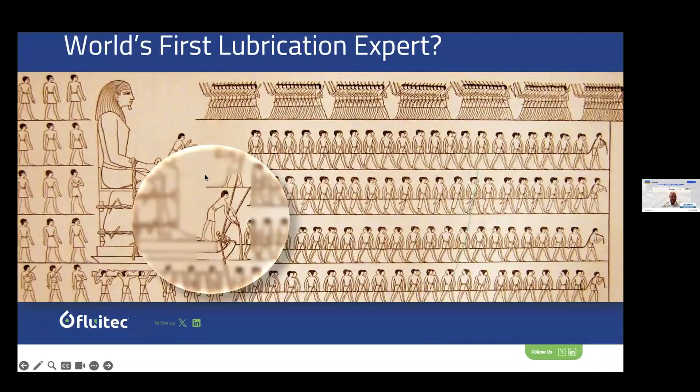So he might be the world's very first lubrication expert. But when we move forward to more recent times, there has been a lot of reporting from industry specialists and reporting agencies that there is a lot of money to be made in the industry by improving efficiency of lubrication. And they called it here, they started to call it in 1966 its own science, tribology, the science of tribology, which means the science of surfaces in relative motion to each other, and also including lubrication, friction, and wear. That is what tribology stands for. So this term was coined in 1966, and this is what we still use today.

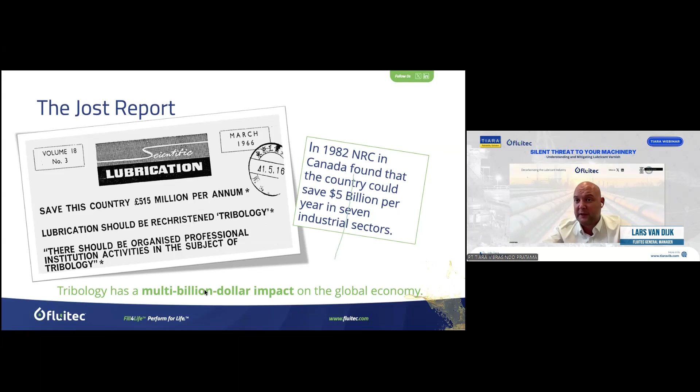In 1982, for example, a research in Canada found that there could be 5 billion saved across 7 industrial sectors if people would pay more attention to lubrication. So this science of lubrication has a multi-billion-dollar impact on the global economy and has a lot of potential to save money for the end users. And today we will dive into a little bit of how.

So how can this lubrication thing, this tribology, actually save you some money? Well, first of all, it can help you to prevent catastrophic failures. Now, what I'm showing you now is an extreme case, of course, where we have a coal-fired power plant in South Africa. Due to improper lubrication, the valves stuck and the system was able to run away.

The overspeed trip assembly was not functioning anymore. And this led to a runaway turbine, which then eventually exploded. So you can see here the bullet holes, so to speak, the shrapnel going through the roof, and here the parts that were flying around.

The company officially said this was just a routine test and they were planning to destroy it, but that was not true. The employees of this company were unhappy, and they leaked to the press what really happened.

They went behind the backs of their boss and said no, that's not true. This was a failure due to improper attention to the lubrication.

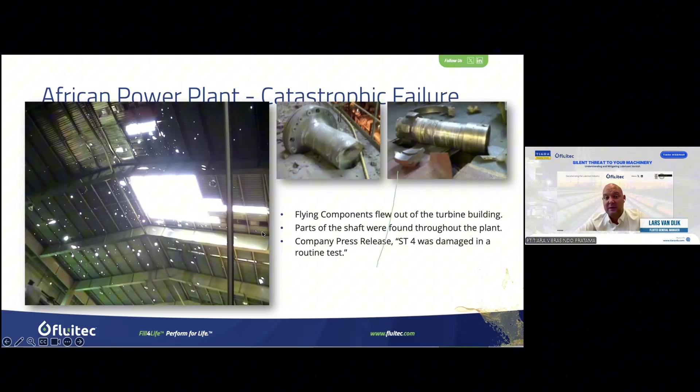Of course, this is an extreme example, but also in smaller turbines. This is in a university campus in the US that had their own power generation. You can see that they were doing a very old-fashioned kind of lubrication monitoring.

They were only looking at viscosity and acid number, which is a very traditional, very old way of monitoring turbine oil. But it doesn't cover everything, and it cannot allow you to be predictive.

So what happened, suddenly there was an issue that went undetected. There was a leak, coolant was mixing with the turbine oil, which led to high oxidation and increased acid number, which suddenly increased the viscosity of the oil. That led to an immediate failure of this turbine.

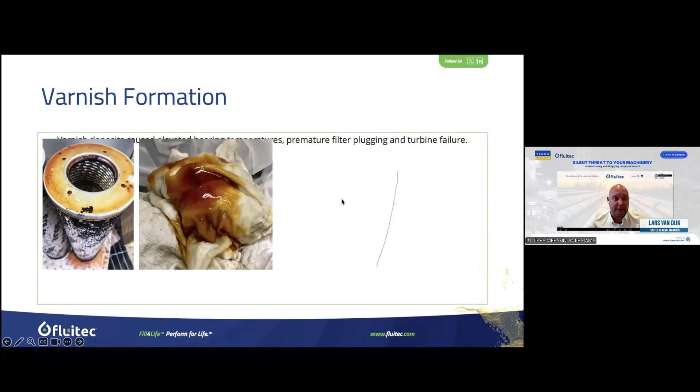You can see in the filter examination that there was clearly a lot of stuff in there that should not be there, and the filters were completely plugged. When we analyzed this, we could clearly see that this was oxidized oil as a result of a coolant leak.

But by then, it was too late to save the turbine. Of course, the damage was done. And this company is now one of the best customers of FLUITEC because they never want this to happen again.

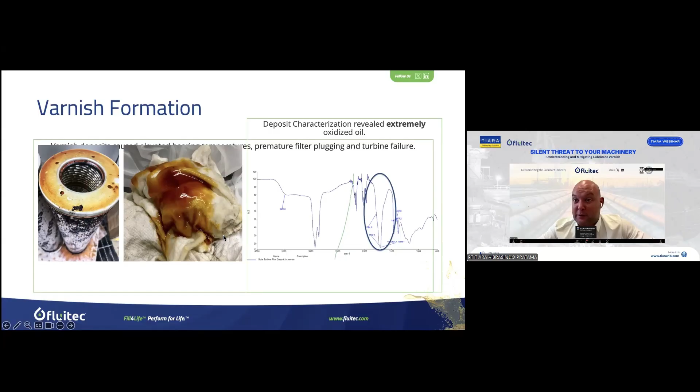So another way of looking at this is when we look at the environmental aspect. When we consider lubricants as a bad industry for the environment, that's logical, right? It's a brown industry. It takes a lot of energy and a lot of pollution to produce lubricants.

But when we look at the scale of lubricant production versus the energy that gets lost in friction, you can see that the energy lost in friction is many, many times more than what it actually costs to produce lubricants.

So even if we reduced the friction by a few percent, we could save so much energy. That means if you're a power plant, or even anything that uses a lot of moving parts, by reducing friction, you reduce your energy expense enormously.

Now, of course, we live in a world today where energy prices are going up and up, so this becomes even more impactful. By increasing the efficiency of your lubrication, you reduce friction, you increase your efficiency, and you reduce your energy spending.

Good for the environment and good for your bottom line. So you save money while you're also helping to save the environment.

So let's look a little bit deeper into rotary equipment, turbines and compressors. Later we'll talk a little about hydraulics. I'll go over this fairly quickly because people who operate this will be very well aware.

But just to give you an overview, these are the typical types of rotary equipment with varnish issues, such as gas turbines, generators, self-synchronizing shifters, steam turbines, auxiliary systems like oil tanks and pumps, and gearboxes.

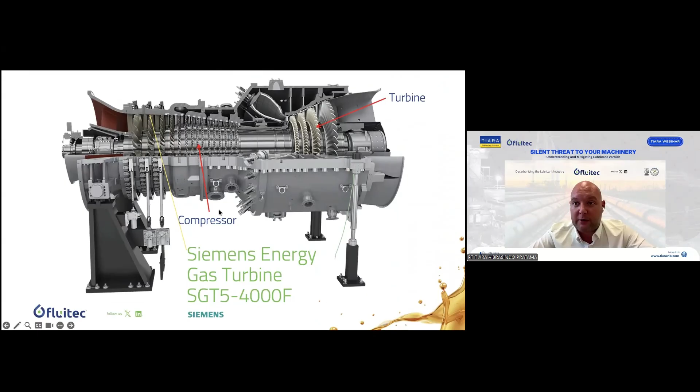Just to give you an idea, this is a Siemens Energy gas turbine 4000F, the SGT5-4000F, which is a very commonly used product here in power gen. We are treating one of these in Singapore, huge turbines, 40,000 liters of oil, so big systems.

The critical areas would be in the bearings and in the inlet guide vanes, because they are operated by valves. And if these valves start sticking because of improper lubrication, then we can run into issues.

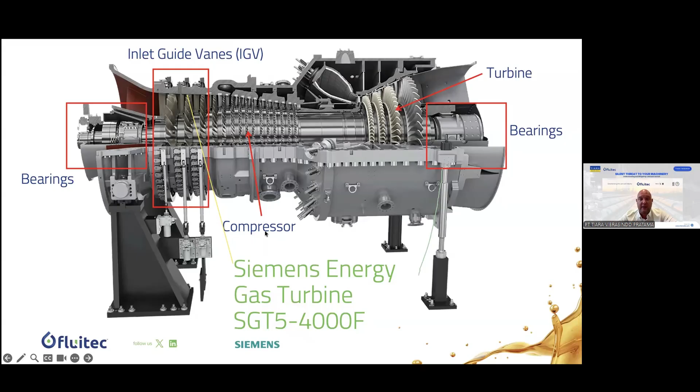This is an example of a steam turbine, in this case a nuclear steam turbine, a huge unit, this one an SST 9000. You have a high pressure turbine and low pressure turbines.

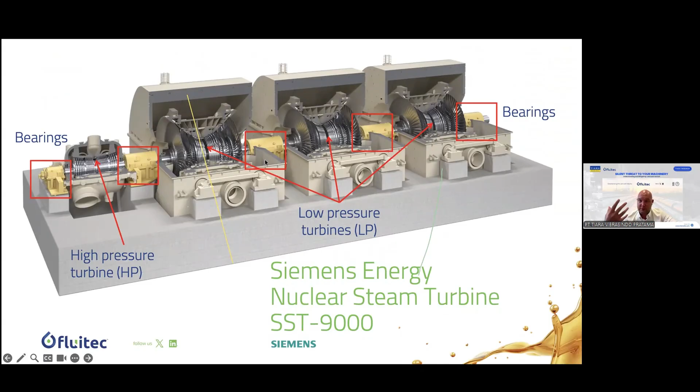Critical areas where a lot of oil runs through are the bearing systems as well. They can have varnish, which increases their temperature and leads to a lot of issues.

Let's look at a typical PowerGen oil module. This is a big engineering part of the turbine, because sometimes you think an oil tank is just a tank, but actually it comes with a lot of complicated systems and redundancy. For example, you have two full capacity AC lube oil pumps.

And for when there is a failure in power, a direct current emergency oil pump. Two full capacity redundant oil filters, two full capacity, fully redundant oil coolers.

So when one fails, there's full redundancy. This shows you how much emphasis the OEMs put on proper lubrication and on the oil system.

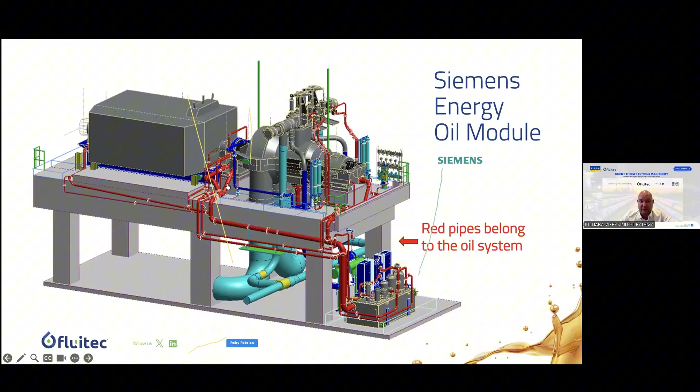You can also see this from this diagram here. The red pipes in this system indicate everything that's part of the oil system. It's a huge engineering item, with a lot of areas where the oil has to flow through and can encounter stressors and other things that could impact its performance. It's an enormous engineering part of power gen turbines, for example.

Now let's look a little bit at how these oils can degrade and what the problem of varnish can be in these systems.

I don't know if you guys can see this yellow line appearing on my screen, but okay, I'll try to work around it.

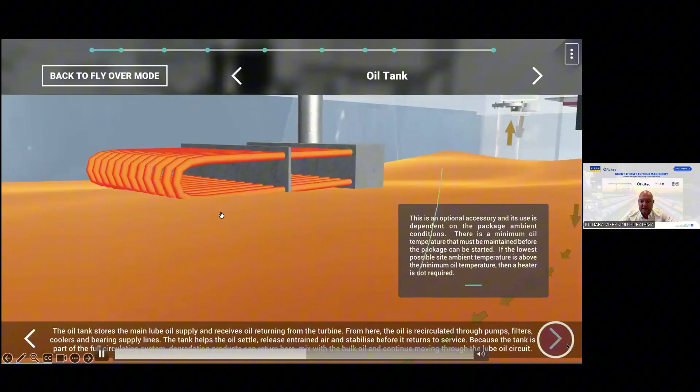So this is an animation where you can see the turbine gets opened up, and we can see a little bit about how the oil system works. This is a typical power gen gas turbine package, and this is the oil tank that in this case has a submerged heater, which is not always the case in turbines. But when there is an oil wetted heater system, this can of course be impacted by varnish. Sometimes the oil needs to be heated before starting the turbine, which can be a reason to have this kind of system in place.

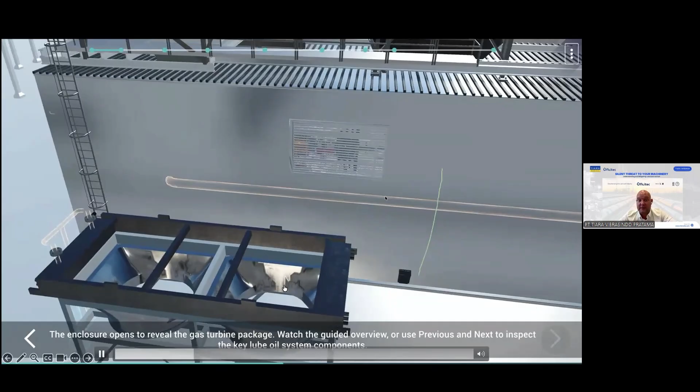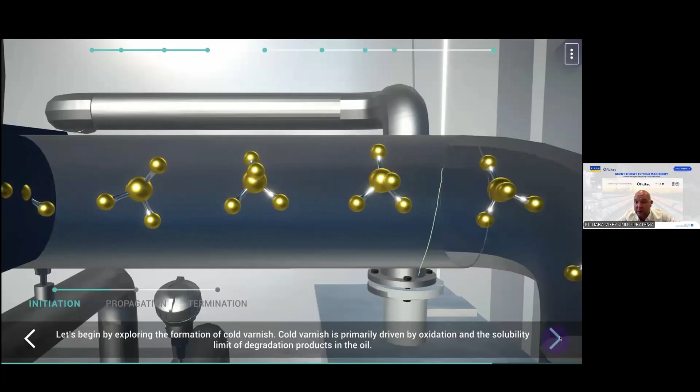Now we can look at exploring how varnish originates. You can see here these are depictions of hydrocarbon molecules, so oil molecules flowing into the turbine system, nicely clean. But let's look at what is happening to this molecule when it flows through the system.

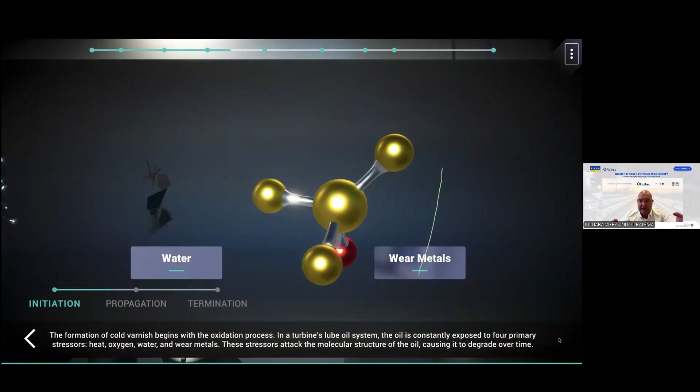Now it is starting to be interacted with, or affected by stressors. Those can be heat, oxygen, things like water, also wear metals in your system, all impacting this oil molecule. You can see that it's suffering, it's starting to degrade, it loses a little bit of its composure, and it might even become a charged particle. So that is the initiation.

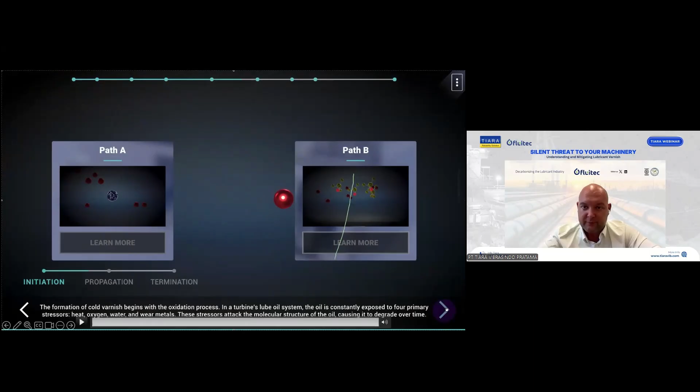What happens then? It produces something called a free radical, a molecule that is very reactive and doesn't have a purpose. Now we have this free radical, and there are two things that can happen to it. Let's see what can happen.

The first option, path A, is that we have an antioxidant in the system. The crystal ball here is the antioxidant, and it starts to neutralize these free radicals, because that is what an antioxidant is supposed to do. It's going to protect the oil from these free radicals. But the more it does that, the more it reduces in power. So the more free radicals you have, the more antioxidants will be consumed, and your antioxidant level will get lower and lower.

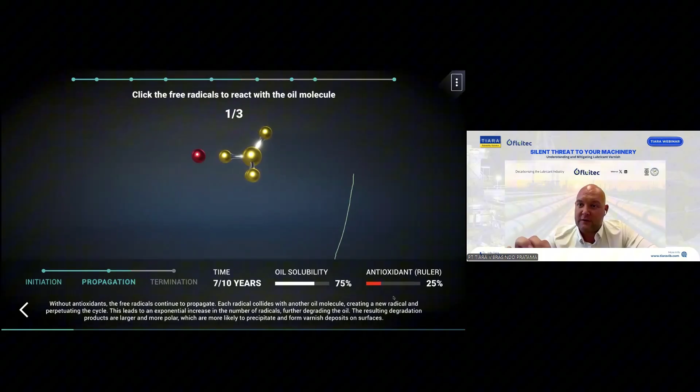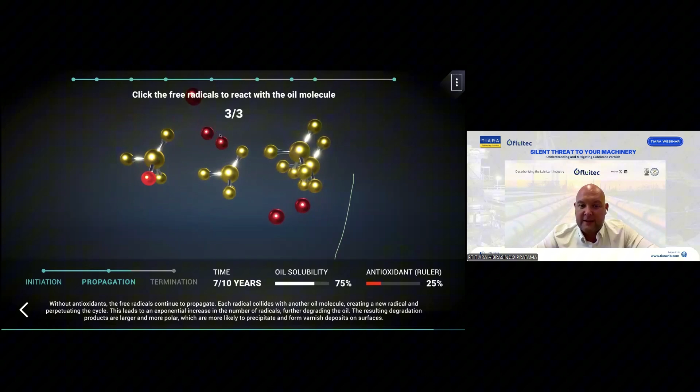So then when you do not have any more antioxidants, you start to propagate the free radical. That means these molecules being attacked by free radicals are no longer protected by antioxidants, so these free radicals can reproduce and attack other molecules. That is how we really start to degrade the oil. We call it propagation because this problem gets bigger and bigger, and your oil will start to degrade from this point onwards. So it's very important to keep a good eye on the additive level, primarily the antioxidants in your oil.

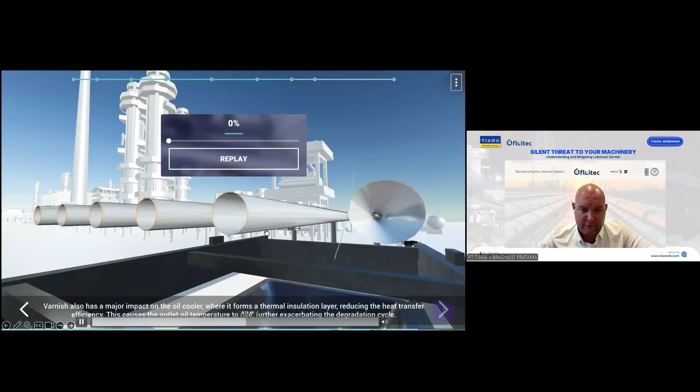So let's see here what happens when we have varnish in the system. For example, you can see this in oil coolers or heat transfer systems—you can visually see varnish occurring in your oil system after this has happened. But also in hot areas of the turbine, that is what we call hot varnish, where the oil film is operating under high pressure and high load, and the actual oil film is very, very thin.

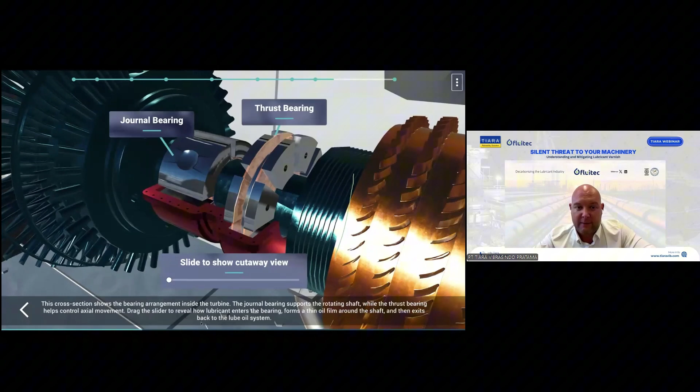That is where we have what we call shear stress on the oil. This happens in, for example, journal bearings or thrust bearings, which you can see depicted here. There's only a very thin layer of oil, even if you have 40,000 liters of oil in your system. Right in this bearing, the oil layer is very thin and exposed to a lot of heat and stress. So when you have varnish in your system and it goes into the bearing or thrust bearing, it will create localized hotspots and deposits.

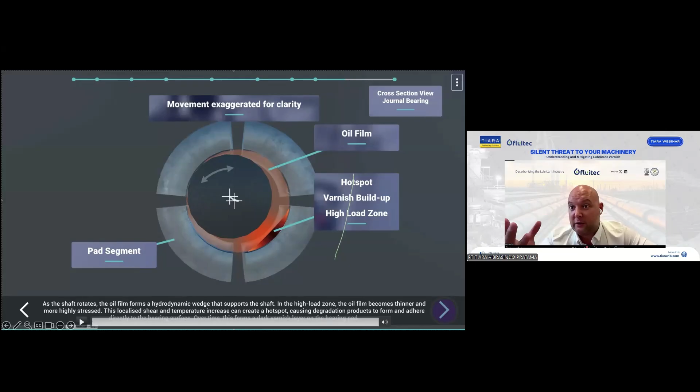There could also be a hotspot in the oil film itself, in the bearing, that is increasing the varnish buildup locally. That's what we call shear stress deposit, which you'll hear more about later. So there you have a hotspot and a buildup of varnish in this bearing—that's the picture I showed at the start of the presentation, a perfect example of what's happening here. The hotspot leads to localized varnish buildup in the high load zone, causing deposits, otherwise known in the industry as hot varnish.

We figured out that in the oil film, the hotspot can go above 200 degrees C in the oil layer, and that can really degrade the additives of the oil. This has been supported by research with OEMs, which we can share with you in the future.

Let's see what happens to the bearing once this varnish occurs. The bearing is lubricated by an oil wedge—I know the positioning of the shaft isn't entirely accurate here, I apologize, we need to update these animations, but for now it works to explain this. Here you see the varnish building up, which increases your temperature. The temperature will go up, but then the varnish will suddenly be wiped off. We're depicting that wipe-off event here—let me play it again.

What's very telling when you have varnish in your bearing is this symptom: you need to pay attention, because when you have these temperature fluctuations in bearings, that likely means you have deposit or varnish in your bearing. You can measure that not only by oil analysis but by looking at the temperature. Look at how it fluctuates—it goes up, then suddenly down. We call that a sawtooth pattern. When you encounter this in your bearings, it is most likely due to varnish and deposits.

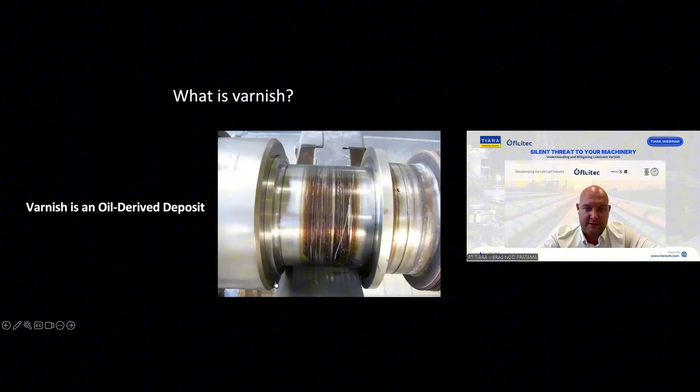Varnish is an oil-derived deposit, so it's not an external contaminant. It's coming from inside your oil, from oil degradation, and it's very difficult to wipe varnish.

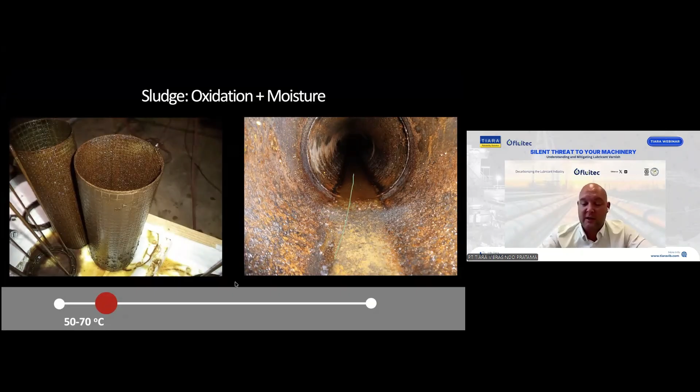Let's look at the different kinds of varnish we encounter. Sludge, for example, is usually oxidation plus moisture—very sticky, sludgy. That's why it's called sludge, material that is easy to wipe or manipulate. It gets clogged into your filters or piping system, as you can see here.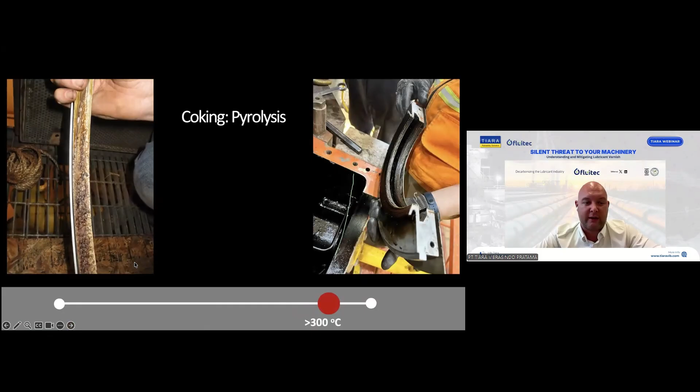At much higher temperatures, you can get coking or pyrolysis, but this is really rare to see—just for completion, we included it. Varnish can have a lot of different appearances, not just one brownish substance. Sometimes we encounter jelly or coking in the filter, which are actually also forms of varnish. It can come in many different colors too—it's not just one type of degradation. There are many complicated origins that can cause varnish in your system.

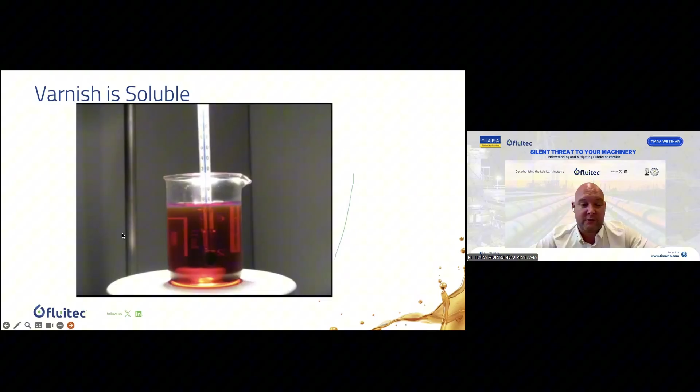What's also important is that varnish is soluble. At room temperature, you can clearly see something is wrong with this oil, but when I increase the temperature to about 50 degrees C, the normal operating temperature, the varnish suddenly dissolves, and with some turbulence it dissolves even quicker. These are the exact operating conditions in your equipment. This is why you cannot filter out varnish—once in operating conditions, it passes through your filter membranes and is almost impossible to remove unless you use specialized solutions, which we'll talk about later.

So let's look at why this is such a big issue today.

What is the origin of that? That is actually a multifactorial thing, because it has something to do with the application side. The OEM is always pushed to design higher efficient turbines, higher thermal loads, higher power outputs, and so on, which finds its way into the design of the oil system, the design of the bearings, the valves, and all of that. Everything is always designed to be more efficient. The oil volume tends to become smaller because they want to use less oil for a varied amount of reasons.

On the other side, it has something to do with the oil. The formulation of the oil, the actual chemistry that goes into the oil, has changed. There's different kinds of base stocks, different kinds of additive chemistry that is combined with the operating conditions that the OEM has now designed. That is basically creating a lot of varnish at the moment. So it's a huge issue.

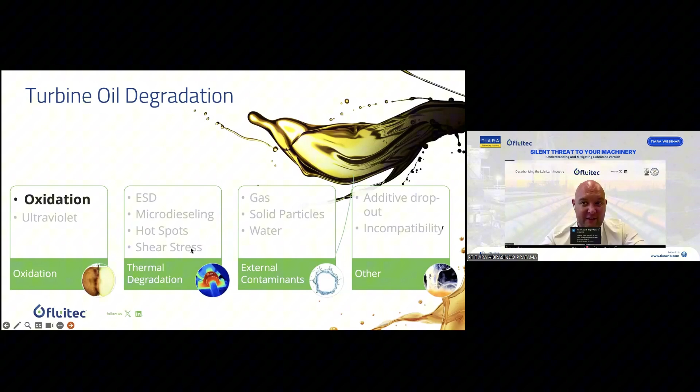Let's summarize a little bit about the two main failure modes that we have distinguished so far in turbine oil, so rotary equipment, for example, but this also applies to hydraulics. It's the same method of degradation that we see in hydraulics that we can also treat with our products. For example, the main thing is oxidation. Everything oxidizes when you increase temperature. It doubles in oxidation. By 10 degrees temperature, the rate of oxidation doubles.

Another thing that we've looked at already is shear stress. On the hot zones of your equipment, shearing stress can increase the temperature of the oil film, which then leads to deposits and varnish. Or the varnish that is already in your system tends to settle out in the hot zones of your equipment, which are also the most critical zones. So this is a huge issue.

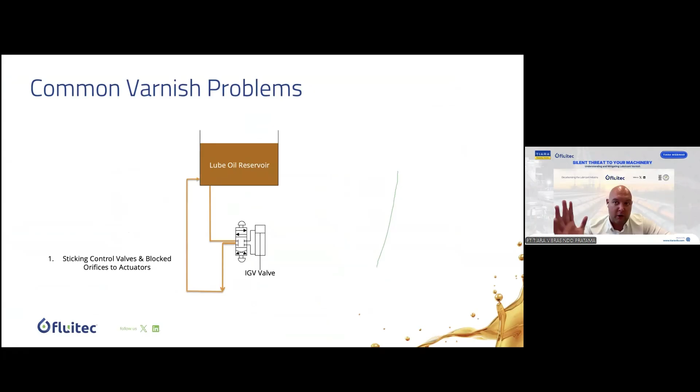So what kind of impacts will this have on your equipment and on your components? First of all, the lube oil reservoir, like we have just shown also in the picture, you can clearly see the bathtub ring, and it's not easy to wipe that. That can be the first indication of varnish in many cases. But the biggest issue that we see operationally are valve sticking or blocked orifices to the actuators, which reduce or even completely block the oil flow. That leads to massive issues.

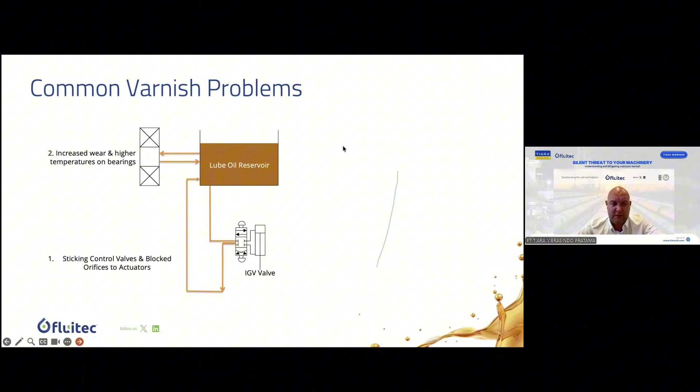That is also the case that we saw with the exploding turbine in the beginning. That is a perfect case of valve sticking. The second most common problem with varnish is bearing instability. Remember the temperature graph that I showed you, the sawtooth temperatures? That is bearing instability. It will also correlate with vibration. A huge issue at the moment for turbine users and rotary equipment.

Seals, when you have deposits in your oil, some oils are acting as a sealant, but also the degrading chemistry of the oil can impact the seal integrity. So you will get leakage of seals, for example, due to oil degradation. And what we have seen also in the animations earlier is cooler or heater efficiency. When they are coated with a layer of deposits, they become insulated and they reduce in efficiency.

So very often we visit plants that say, oh, my startup time increased a lot because my plant is old. And then we start to treat the varnish and remove it from the system. And suddenly the startup time reduces back to when the plant was new. And the operator thought this was not possible because they thought it was just wear and tear of the heater, but it was actually a varnish problem. So when we remove the varnish, the startup times reduce back to new.

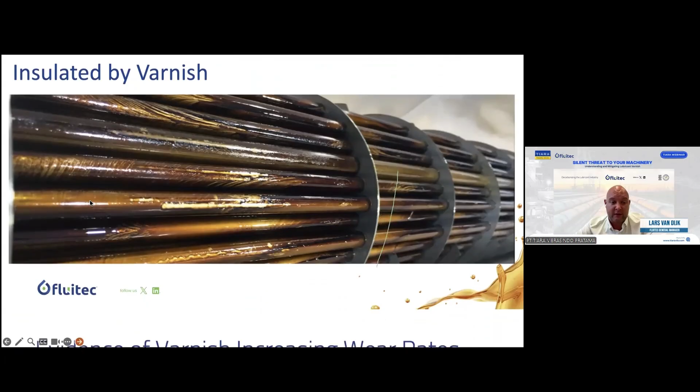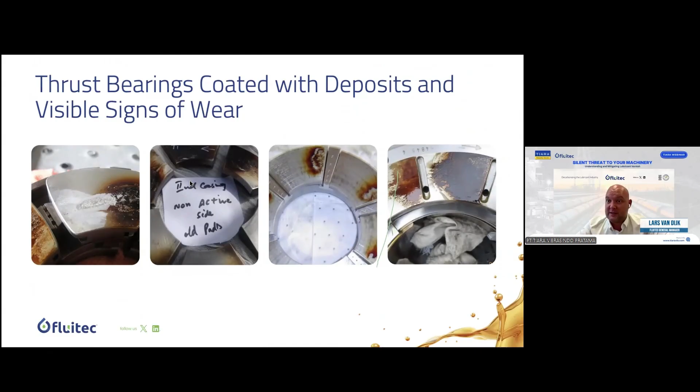Thrust bearings, the same thing. You can see here on the most left picture, you can see that there has been wear. So that means removal of metal. This is due to fatigue wear, due to constant metal-to-metal contact, slowly pitting out metal of the bearing, and this will increase the wear metals in your system and will eventually lead to a total bearing failure.

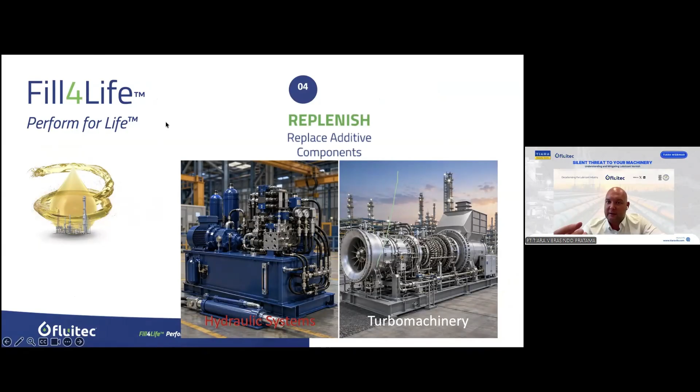Now let's look a little bit at rotary equipment, but what about hydraulic systems? And let's look also a little bit at the additive system of the oil, the chemistry of the oil, because there is such a thing that we call fill for life or perform for life, which are linked to each other. That means that we can replenish or replace the additives in your oil to prevent oxidation.

So modern hydraulic systems, for example, they fail mainly two ways at once. One is generation of deposits, so oxidation related. The other one is because the additives are depleting. That means that, for example, in hydraulic you have sometimes zinc or complex antioxidants, which then reduce the anti-wear capacity of the hydraulic. That leads to high wear and tear of the equipment. So it's deposits and oxidation and additive depletion.

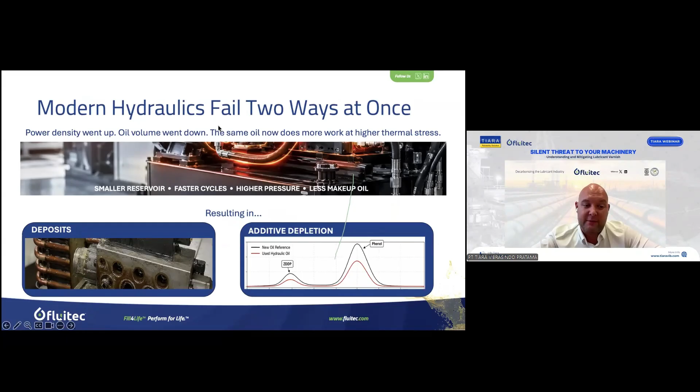And in hydraulic, we also have the same problem that we see in turbines. The power density went up. That means the equipment needs to be more efficient, whilst the oil volume is going down. So that means more stress on the oil, which leads to bigger problems with oil systems.

So when varnish shows up in hydraulics, you can get things like valve stiction, loss of heat transfer of the oil, and wear and internal degradation of your system, of your equipment, because the additive system is no longer able to protect. So for example, in injection molding, you can get shot-to-shot variation, which means that maybe you have to scrap a whole batch of material because the production was not accurate enough. That can be due to valve stiction, for example. Of course, higher scrap leads to lower yield and more frequent, longer taking mold changes.

Presses and stamping, you could get a line-wide downtime just from one little valve stiction, and we see this a lot. So this is a big issue, and it's so easy to solve because it's just due to a little bit of varnish in the system. But it happens - the whole line will be shut down because of a minor deposit issue.

In steel, you can have a quality downgrade and breakout risk because of the degradation of the gauge control. Mold oscillation and instability can happen as well, for example. And in pulp and paper, you can get off-spec reel and hours per break, for example. So pulp and paper is an area where you see huge oil volumes and a lot of emphasis on heat transfer as well, and that can be highly impacted by varnish.

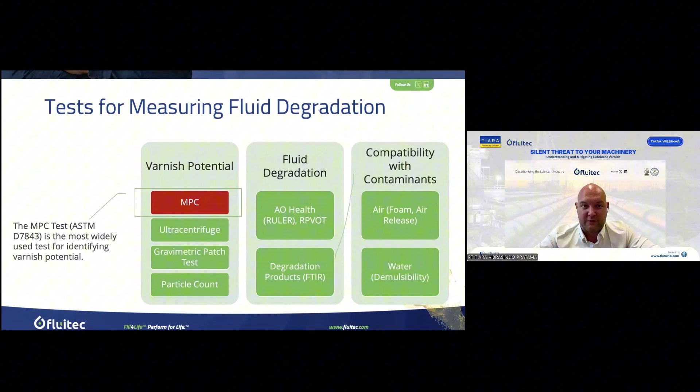Now, when we talk about solutions, we first need to talk a little bit about testing, because we need to perform the right tests on the oil, especially in rotary equipment. In hydraulics, this is maybe less common, and you can look at operating conditions such as clamping speed, accuracy of your injection mold, valve sticking, and so on. That's for hydraulics, the main mode of looking at it. But when you have big oil sums, a huge power gen turbine, usually you will have some form of oil analysis program, and you will test your oil hopefully regularly.

So the tests that we would recommend to prevent varnish are actually two main tests. The most obvious and easiest one to do is the MPC test. Our partner PT Tiara can help you with setting this up. The MPC test under ASTM D7843 is now the most used test to look at the varnish potential of the oil, and I'll show you how it works.

Another test that's very important is to look at the additives of your oil. You can do that by doing a destructive test on the oil, which is the RPVOT, that oxidizes the oil to failure.

But that's a pretty difficult test to do, and it takes a long time, and you need to have a lab that is able to do it. It's usually quite expensive. So we have developed another test, called the RULER test, which looks at the amount of additives in your oil. Combine this with the other tests you see on the screen, and now you have a full oil analysis program that allows you to be more preventive instead of reactive with your oil.

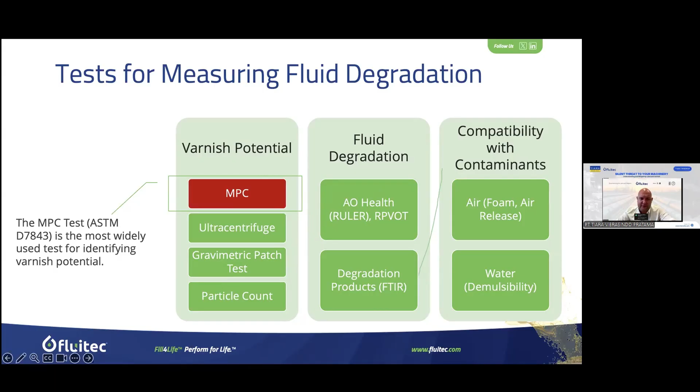So a little bit of an example about the MPC, how it works. It stands for membrane patch colorimetry. It's a very quick, cost-effective way of assessing the oil's varnish potential.

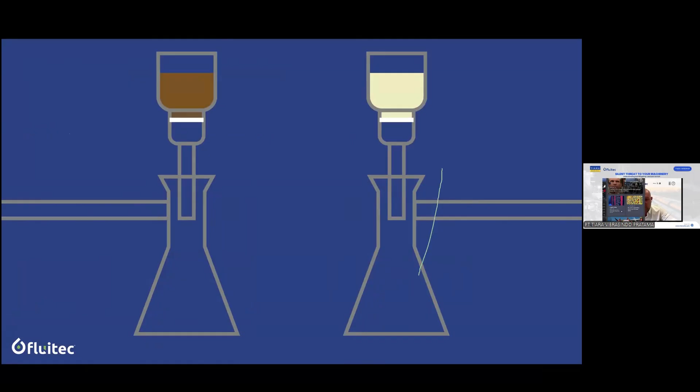Because when we run the MPC on the lighter colored oil - this is an example of the MPC test - it gets pumped through the patch, which is here in the white area, and then we measure. And as you can see, surprise, the light-colored oil has a higher varnish potential than the dark-colored oil. So the MPC test is perfect for determining how much varnish is left on the patch. We rinse the patch with a non-polar solvent, which attaches the varnish to the patch, and then we can measure how much varnish potential is in the oil.

So we do that via delta E. And the oil color is not related to the amount of varnish that is in the oil. I think that's always very important for us to highlight, because so many people in the market still look at oil color as a very important way of determining oil health. But we have seen beautiful light brown, golden colored oils that give you very high varnish potential. So please don't look at oil color as a reliable method.

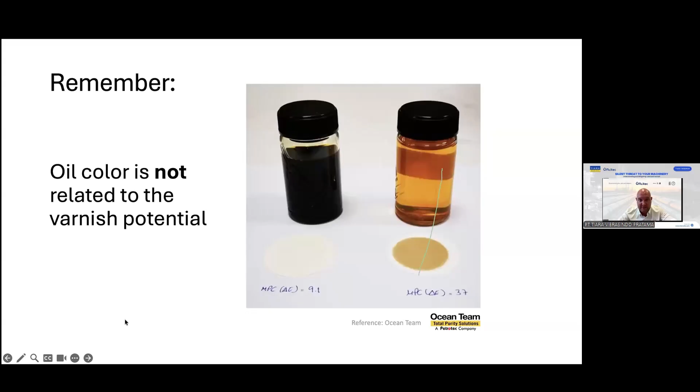As you can see here, on the left side, we have almost black oil that has an MPC of 9.1, which is very good. On the right side, a beautiful colored brown, goldish colored oil, and surprise, an MPC of 37, which is critical. So the right oil needs to be changed. The left oil is actually perfectly good to go, judging by MPC. So please look at MPC and not just oil color to determine the varnish potential of the oil.

With the MPC test, we can look at the color spectrum for degradation products related to soot, which would mean a temperature issue, EP additives that might have come out of solution or been degraded, and sticky deposits generated as a result of oxidation. So it gives us a little bit of an indication of what the problem is in your turbine.

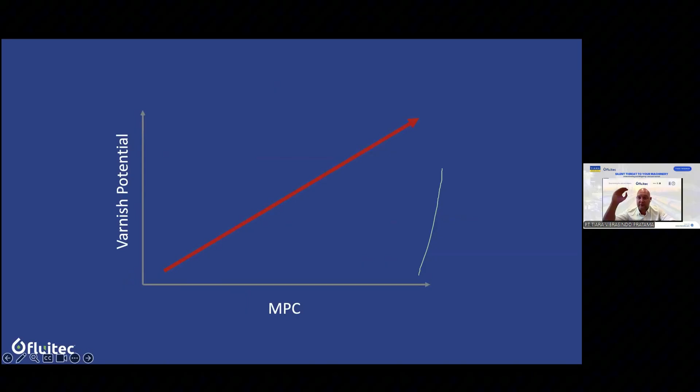If there's a lot of soot, a black patch, a high L level on the patch, we can look at thermal degradation, for example. If there's a lot of sticky oxidation-related deposits, we know we should probably look in the direction of oxidation. So the higher the MPC, the higher the varnish potential of your oil. The MPC is a very handy test to look at the health of your oil.

Now, when we combine this with RULER testing, that means we look at the antioxidants in your oil. We have two things that we look at: phenolic antioxidants and aminic antioxidants. Typically, turbine oils have these two antioxidants. In hydraulic oils, you would also have ZDDPs, for example.

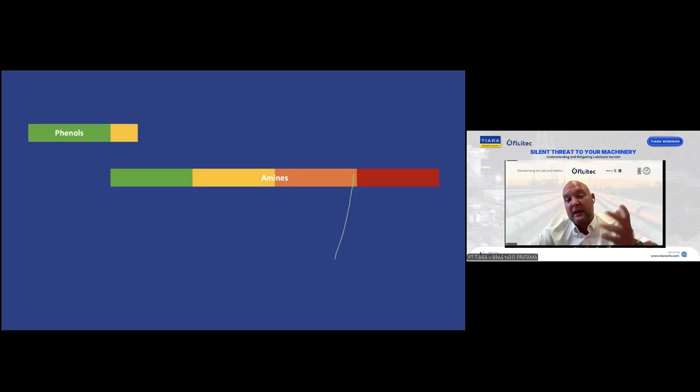If you have a zinc-free hydraulic, it would likely be aminics as well, or some phenols. But when you have a zinc-containing hydraulic, it's usually ZDDP as well. So we can measure that as well with the ruler. But this is for rotary equipment at the moment, what I'm showing you. So this would look at phenols and amines.

What we want to do with the ruler test is determine how much percentage of these additives are left. We want the oil to always be more to the left side - so more than 50% aminics left in the oil, or even more than 75%, is usually even better.

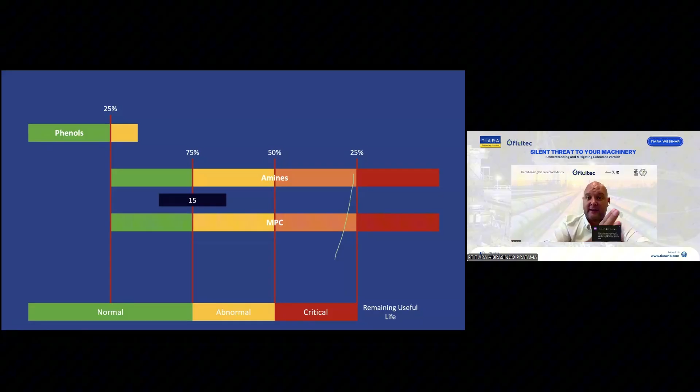The MPC test, we can put these two alongside. We want the MPC to be below 15. So if both of these are okay - meaning the ruler test is more than 75%, the MPC is below 15 - then we can say this oil is in good condition, and you are very unlikely to have varnish. In other words, you will have a good turbine oil life.

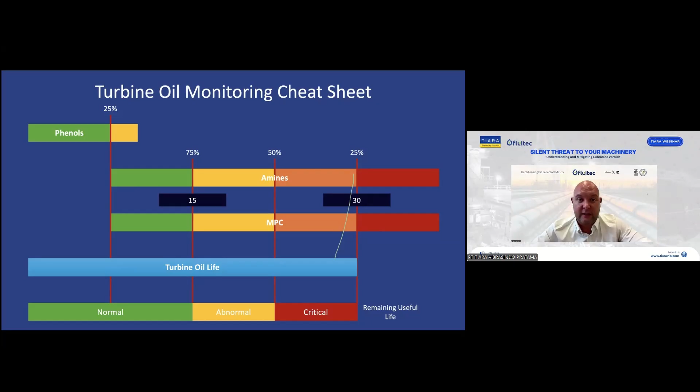The more it degrades, the less additives you have, the higher your MPC will be, the less life you will have in your turbine, and the more action you should take. We call this the turbine oil monitoring cheat sheet because it's a very easy way of doing some relatively simple tests. The RULER and MPC are not very complicated tests, and they give you a very easy, predictive way of looking at your turbine oil. Now, in field solutions, we can distinguish two main areas to deal with all these issues we've talked about today.

Firstly, we can look at filtration. We can do specialized filtration, which is based on electrophysical separation or ion exchange, which is a chemisorption process. It's like a chemical filtration process that's able to absorb the varnish from your oil that normally passes through your depth media. So it's a special filtration system, not a normal depth media filter, and it's tailored to removing varnish from your system.

Secondly, we can look at adding something to the oil, because the problem with varnish is solubility. It comes out of solution, but if we prevent that by adding a solubility enhancer to the oil, it never comes out of solution, so it doesn't become a problem.

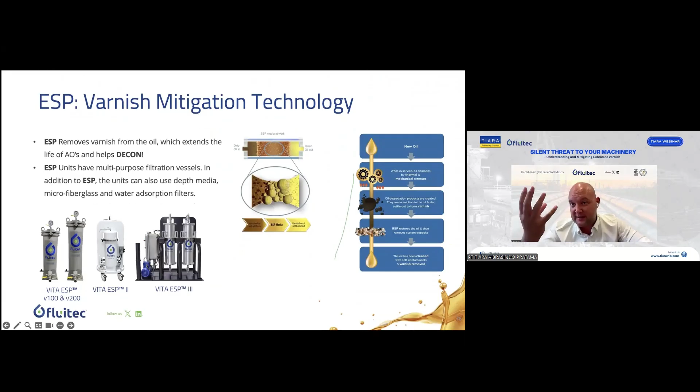First, let's look at the ESP system. The ESP is an ion exchange resin filter. There's resin inside the canister that's in a kidney loop system in your oil, and this interacts with the varnish, absorbing it into the resin media bead, cleaning up your oil. We use a specialized resin for varnish that we've researched for years, and it doesn't interact with your additive system or other oils, and it's very efficient at removing varnish.

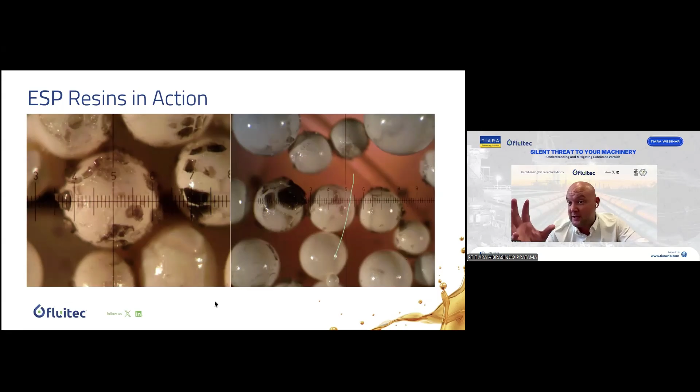So the oil passes through these resin media, and the resin media slowly absorbs the varnish. These do get saturated at some point, so we need to change them every 6 or 12 months, depending on how varnished your system is. It's a very efficient way of cleaning up your oil and physically removing the varnish, but it is a slow process and it costs some energy because you need to run a kidney loop in your system, and that requires a pump.

So we've designed another method, which is also very suitable for hydraulic oils because they tend to have smaller volumes, and a kidney loop filtration system isn't always practical on hydraulic oils or gearboxes. But this is also very suitable for turbine oils because it's a solubility enhancer. It's just one dosage into your oil that increases the solubility and prevents the varnish from forming in your system, and it will remove existing varnish as well.

So it stands for decontamination. When you already have a varnish problem in your system, like the bearing issues we talked about earlier, this is a very effective way of decontaminating and reabsorbing the varnish in your system. It works very quickly, with no negative impacts on the oil.

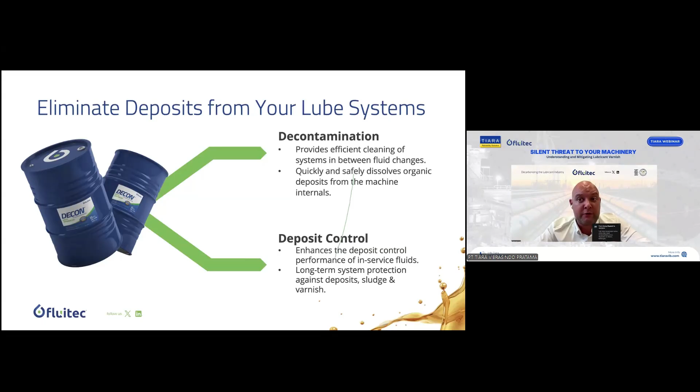We can also use it for deposit control, and that's really unique to this technology, because deposit control means preventive. So we can put it in your oil and let it run as long as your oil is alive. It has no negative impacts, and it will prevent varnish from building up. That's what we call deposit control. It's the only product that can be used both reactively and preventively in the world at this moment. These are approved by OEMs, so they are completely risk-free to use.

How does it work? It's a very simple interaction with the varnished areas of your oil. In this case, we have a degraded molecule, like we showed at the very beginning, that has been stressed and degraded and is producing free radicals. It will interact with the decon product and bond readily with oil degradation products, forming a new molecule which is no longer interactive. It does not produce any free radicals, so it's safe to be kept in the oil this way.

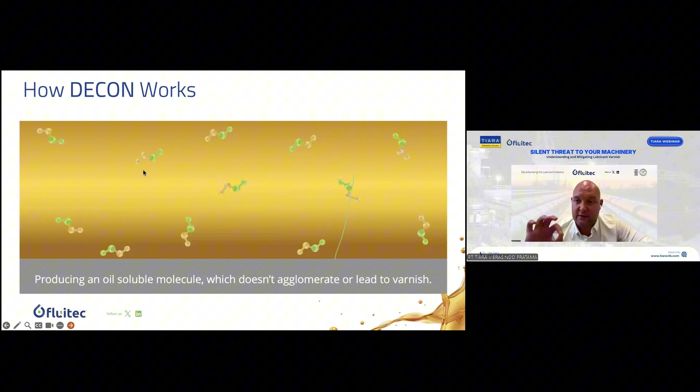Another way of saying it: it's producing an oil-soluble molecule. That means it's no longer interactive. It's no longer forming agglomerates, which means varnish and bigger molecules. It's no longer doing any of that, so it's perfectly safe to keep this molecule inside your oil.

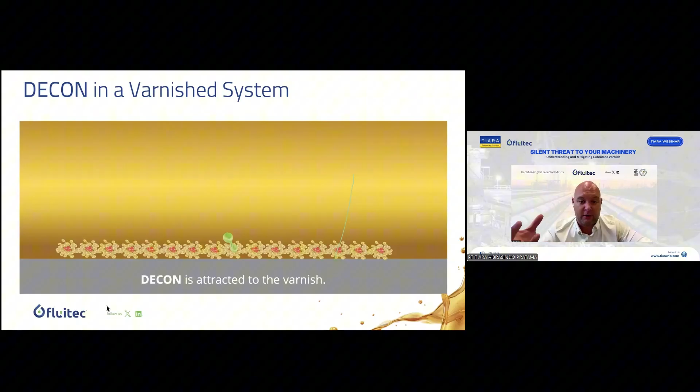Now, what happens if you already have a varnish layer on your bearing or valve or wherever it is in the system? As long as there is oil flowing over it and you have DECON in your system, DECON will be able to interact with the varnish that is already on the metal. It will be attracted to that varnish layer, bond with the core of the agglomerated varnish molecule, and start to generate dispersive forces by attacking that molecule. The molecule then disperses and gets reabsorbed back into the oil, allowing DECON to further interact with these molecules and form oil-soluble, harmless, inert degradation products. This is very safe to do until the varnish is completely gone.

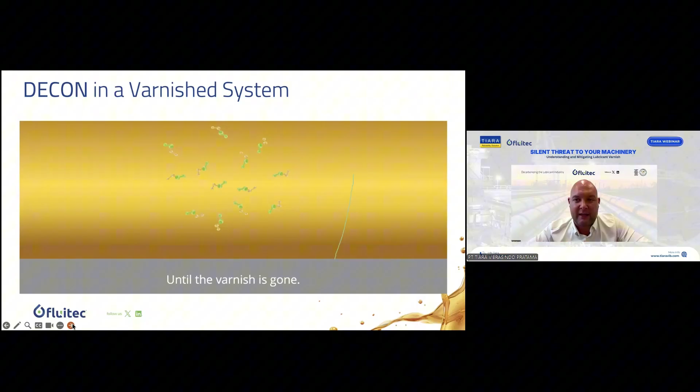Now, you have to think a little bit about the actual amount of material we're talking about, because sometimes people think, oh, this is scary, I'm redissolving it back into my system, that will lead to problems in the future. But the amount of material causing the varnish issues is actually very low. That's what makes it so tricky as well. It's causing a big issue, but typically when we redissolve that amount of varnish into the oil, it's not a problem at all. It can last for 10 years inside your turbine.

Also, with hydraulics, we can do something similar. We have the option of cleaning the hydraulic system with DECON. It cleans the whole system - the valves, the servo valves, anything that has accumulated varnish, the heaters, the coolers, the injection molds, you name it. We can clean that with DECON, and then we can, for example, change the oil to a new oil that will go into a clean system, which will last a lot longer.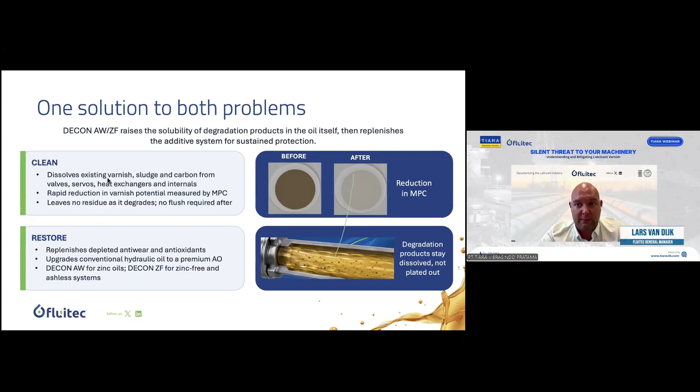But also, when the additives are consumed in hydraulics, we can add something called decon AW or ZF, where we add solubility enhancer plus additives to your system, which then replenishes the oil's ability to combat oxidation and completely restores the oil's ability to function. So that is extending the life of the oil. Otherwise, you would have to discard it. Now we can save your oil and prevent downtime on your system, and both your equipment and your oil will live longer because of this.

So we can solve the varnish issue in turbine oils and rotary equipment, but also in hydraulic systems. Hydraulics are practically everywhere - there are so many applications for hydraulics.

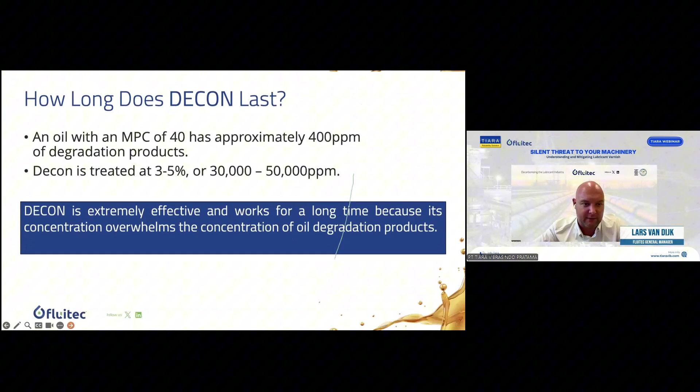So let me just see, because I can see that miraculously I have some time left. So I'm going to show you a little bit more. Let me see how much time I have. Okay, so...

When we have an oil that has a high MPC, the actual amount of varnish is typically no more than 400 ppm - this would be a critical MPC of 40. So when we put a solubility enhancer in, like 3 to 5%, that would be 30,000 to 50,000 ppm to dissolve only this 400 ppm of material. That is why this is such an effective method - it's a really unique way of redissolving the varnish in a safe and efficient way without any harm to your system.

And what makes this product so unique is that we have done a lot of research and we have patented this molecule to be suitable for use in oil.

So let's see - when we look at turbine oils, we also have the option of re-additizing. When the antioxidant levels of your turbine oil are getting low, there are 3 options you can pursue as an end user. You can look at bleed and feed, the very common practice - you discharge a little bit of oil, you put a little bit of new oil in, that keeps everything running nicely. But you are putting new oil into a contaminated or old system, or an old oil, I should say. Maybe your system is relatively new, but the oil is already a little bit degraded, and that new oil will degrade even faster when it interacts with the old oil.

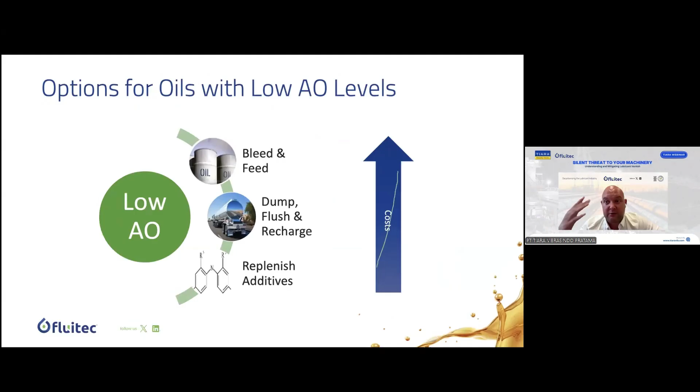So yes, it's an efficient way to prevent this shutdown, but over time, it's the most costly method you can use to replenish your additives, because a lot of bleed and feed is always needed to maintain similar oil health. And actually, you're doing an oil change. If you do 5 times 20% bleed and feed, it's an oil change. So if you do it every year, that means in 5 years' time you have changed your oil. But the oil is constantly in a semi-contaminated state. So the oil companies love this because there's a lot of volume in bleed and feed, but for you as an end user, it's not the ideal solution.

It's actually cheaper to do a full flush and oil change once every 5 years than do a yearly bleed and feed. But another option that we have is replenishing the antioxidants, replenishing the additives. This is a relatively new method, but we have proven this over the last 20 years, and it's a very efficient and cost-effective way that is now also approved by OEMs.

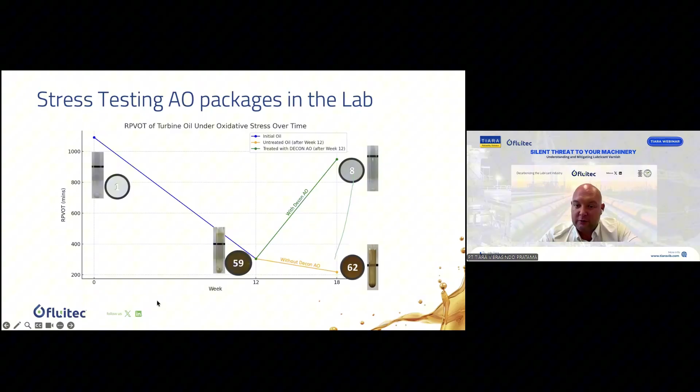If this oil has been in service and reached this point in 8 years, and you revitalize it, we can assume that it can last another 8 years. So instead of changing your oil every 8 years, now it becomes 16 years. If it's 4 years, maybe it becomes 8 years, right? So you can easily double the lifespan of your oil. If you don't do anything with the oil, the MPC will continue to go up, and it will run into a lot of issues, of course.

So let me just, sorry, I want to show another

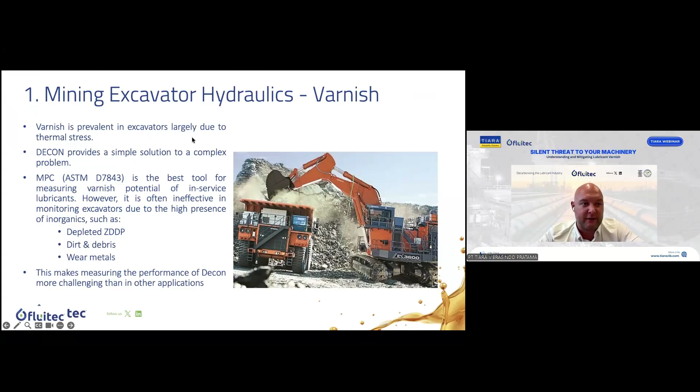Case study as well. In the world of hydraulics, we have also run a lot of case studies and tests. For example, here in excavators, they can fail due to thermal stress. And with Decon, we can provide a relatively simple solution to a complex issue. So we have seen that very common. You can see depleted ZDDP, dirt and debris in the system, wear metals in the system. So that makes it very susceptible to degradation.

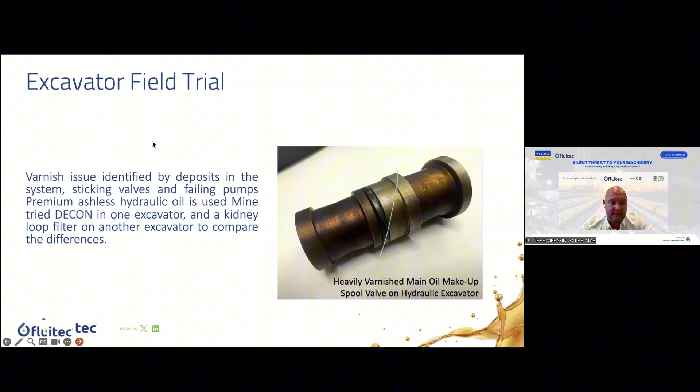And you can see here a heavily varnished actuator in an excavator system, and this led to a lot of issues within the system. So when we add solubility enhancer Decon into the system, this was verified by field trials. You can see that the oil was heavily varnished. And after treating it with Decon, it went back to below 25 MPC, or below 30. So from a highly critical oil, we went back to a non-critical and usable oil.

Over time, we could decrease this even further. And in a big excavator unit, this means that you can save a lot of oil. And also the system runs cleaner, at a lower temperature, more efficiently as well. So we think this is a great case study to see as well.

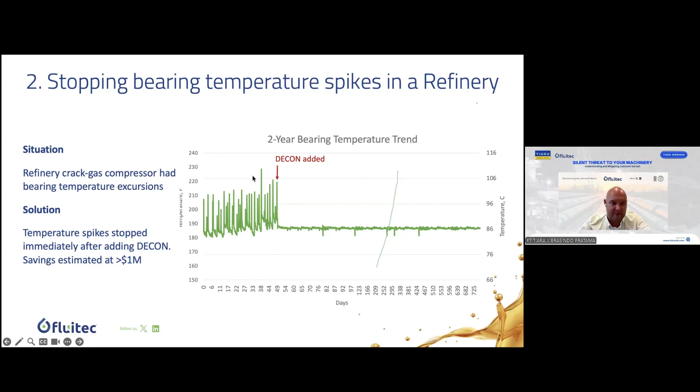So these are some of the main issues that we see with varnish and oil degradation, and also some of the solutions that we can provide to this.

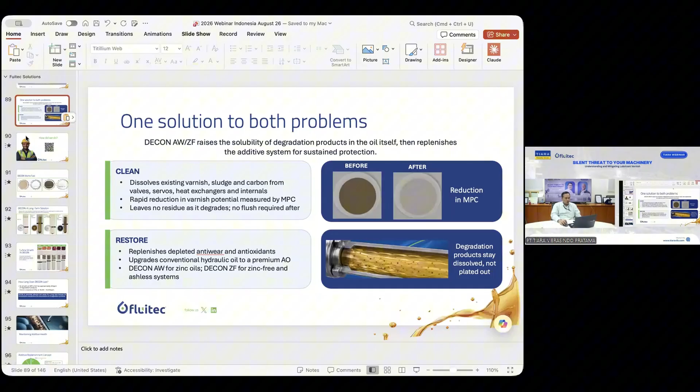Okay, sorry, can you repeat the first part? How to mitigate the varnish issue, yeah. Okay. You want me to share again, right? Yes, about the VRU and the solubility enhancer. Okay, yeah. All right, so let's see. Yeah, that one.

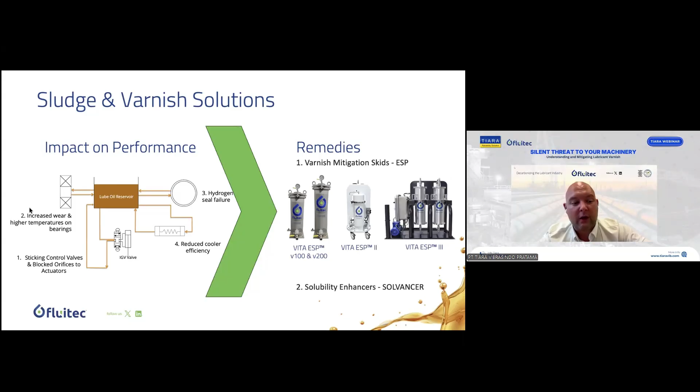Okay, you want me to explain more detail? Let me know. Specifically for the antioxidant, yeah, because there are questions about phenolic and aminic, and he mentioned the aminic drop is faster than the phenolic drop. Is it quite common, or is it a specific case?

Yes. Normally we see... let me use another slide deck, sorry, that has a bit more info on this. Normally we see the phenolics drop first. That's for sure, because the phenolics are actually in place to revitalize the aminic antioxidants.

So when the aminic goes first, that can have various issues. That could be a very intense hotspot in the oil that is quickly degrading the aminics, or it could be some reaction happening in the oil that is directly reacting with the aminic antioxidants.

So we would need to do a bit of root cause analysis on the oil, looking at, for example, if there are varnish deposits in your system. We could do deposit characterization, an SEM EDX to determine whether it's an organic or a wear metal forming the deposits, what is the substance. FTIR analysis could also be insightful to look at the composition of the deposits. And then we can start to determine whether that interacts with your aminic, to find the root cause.

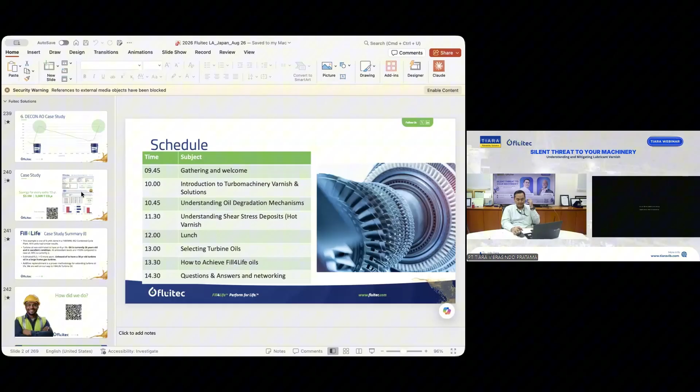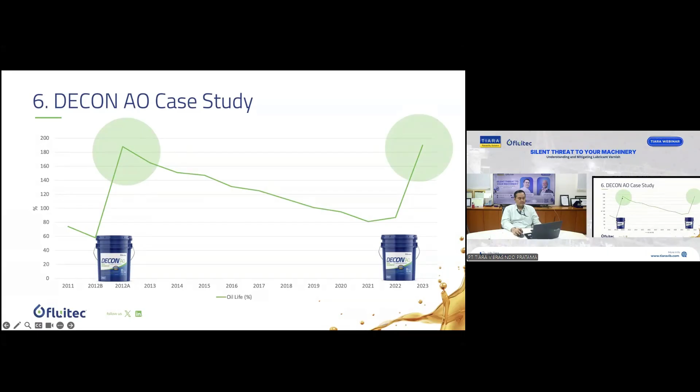So we have done a lot of research on that. Here you can see an example of a customer that has done a dosage of decon AO two times instead of the oil change, one in 2012, one in 2023. And this oil has been in service for a total of 18 years now.

But still, you can see that we have saved this customer $350,000 on this one system by preventing the oil change. So usually, if you count the price of new oil plus flushing, manpower, and the flushing chemicals, and sometimes the displacement oil needs to be counted as well, combining that together is already more costly than putting in decon AO or decon into your system.

Now, if we also count the shutdown time, that's not counted here, because if you want to change an oil you need probably at least a week shutdown. When you add something to the oil, like decon or decon AO, you do not need to do a shutdown. Depending on the cost and value of your production, that can be maybe $50,000, can be $100,000, but for plants making high value products it can be $1 million. With a power plant, the savings of preventing a shutdown can be enormous. So that's also something you need to take into account.